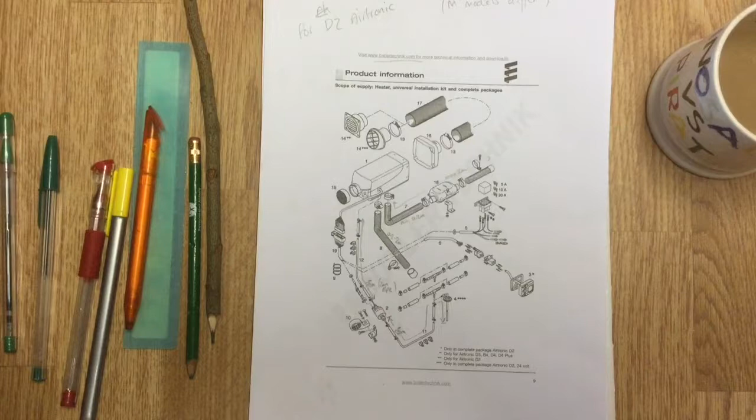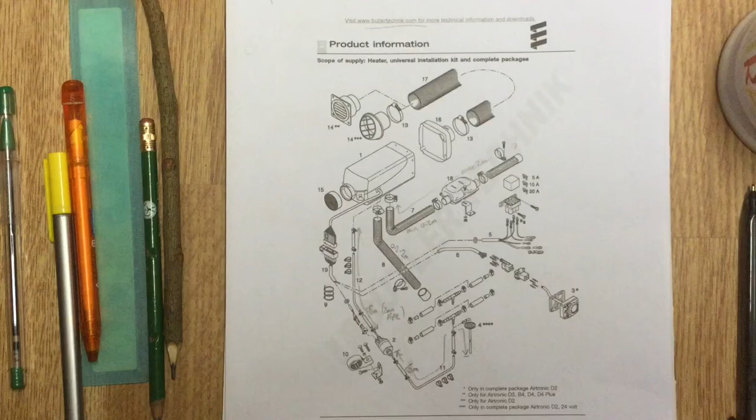I'm not sure whether you'll be watching this at the beginning or the end of the video series, so I'll try to be as in-depth as possible, bearing in mind some people may have seen the rest of the videos and some may not.

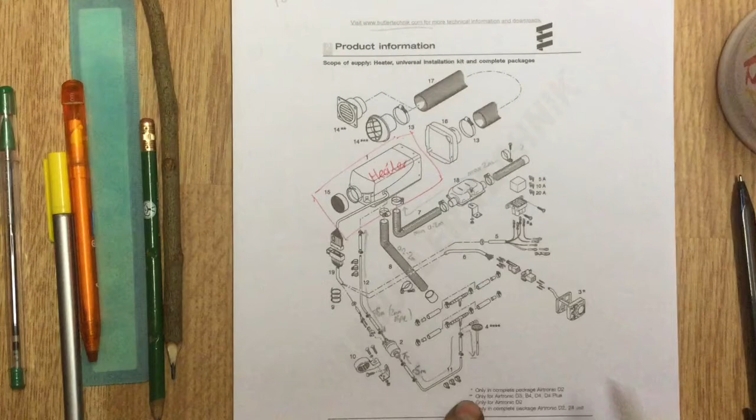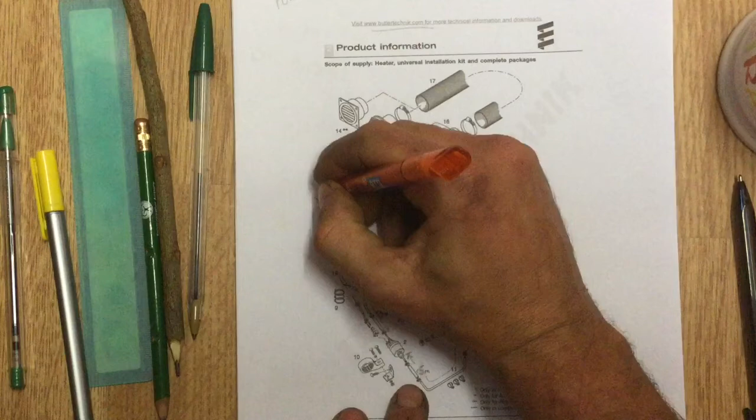So the main body of the unit is just here in this diagram - there's your actual heater. This is the main thing we consider to be an Eberspacher. We've got a few other things to consider, and I broke the video series into different sections. One part is on the mounting, and as part of that we're looking at the exhaust system and intake system, and fixing the main heater into the floor. There's a few things to consider, so we'll go through all the bits and then get started on individual sections.

As well as mounting the actual body of the unit, the other thing we've got to consider is this section here - this is the fuel section, the fuel pump and lines.

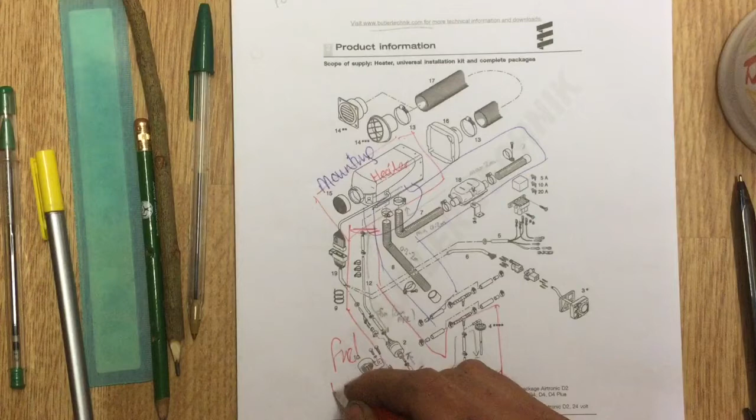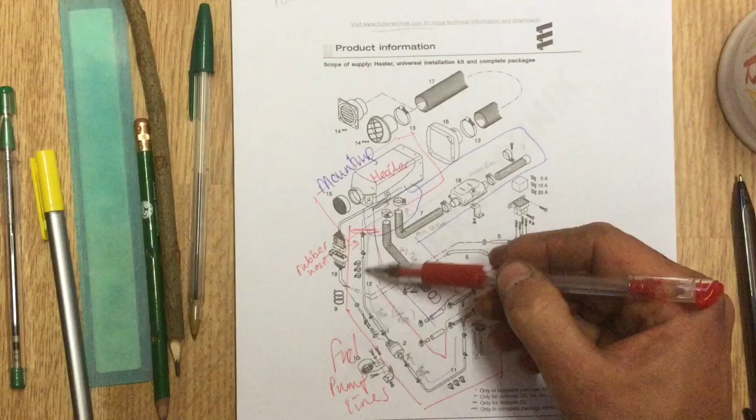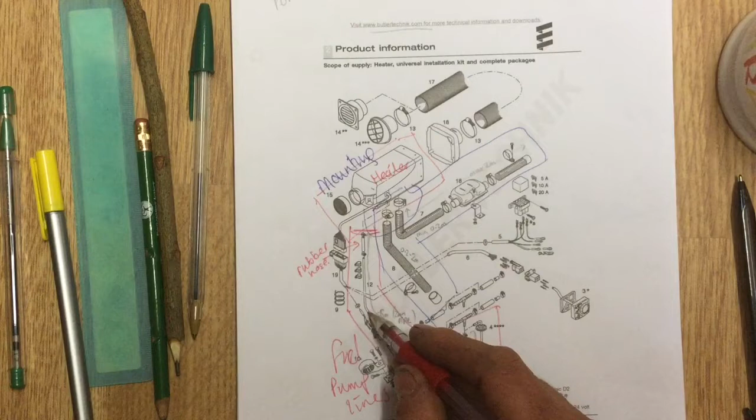That consists of a pipe that comes out of the bottom of the heater, which is underneath the vehicle. We have a small rubber hose just there - you could do it with solid fuel lines all the way, but generally in a lot of the installations I've done I've used sections of rubber hose with a jubilee clip on either side, and then a section of pipe that runs to the pump. The internal diameter of this is about 4 or 5 millimeters. We have another piece of rubber hose here, and it goes over this solid, rigid fuel pipe. The jubilee clip goes onto the fuel pump itself.

So this is the actual pump just there - it's quite small, no bigger than a normal automotive one, about this size. That mounts remotely from the heater, so the fuel pump's not actually in the heater - we mount it further away, and then we have another hose that leads to our fuel system.

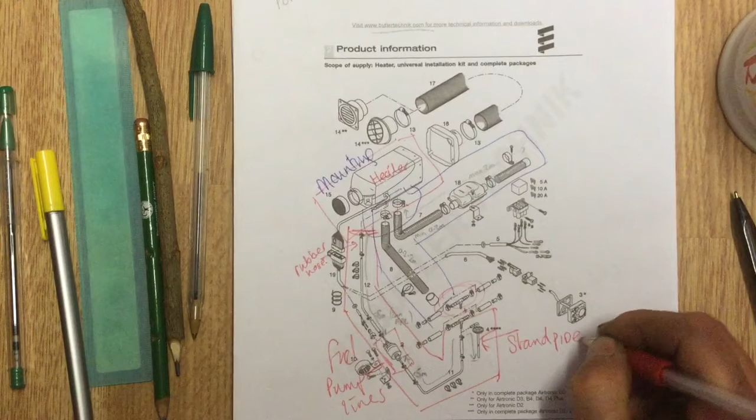If you were installing this into quite a few vans, you'd end up using a T-piece - you just tee into a fuel line running to your engine, which isn't very difficult. I may do a video on that if people ask for it, but the installation I'm going to look at uses a stand pipe instead. The reason for using that is explained in one of my other videos - it's to do with the pressures in the fuel lines in the Citroen Relay. We actually have to install this into the fuel tank, which isn't a difficult task if you know what you're doing, and if not, I'm hoping I've provided enough information that anybody could do it.

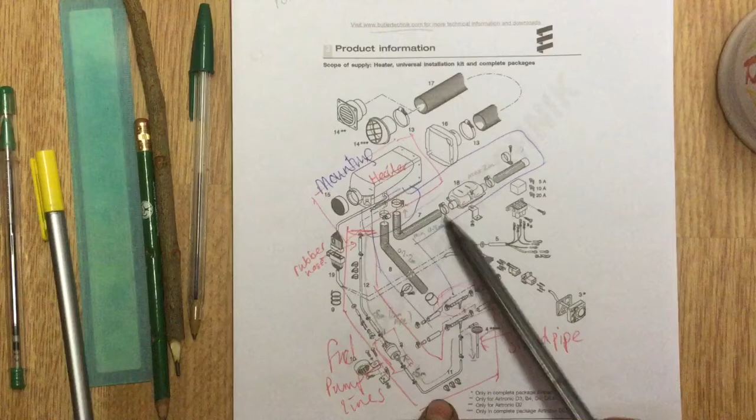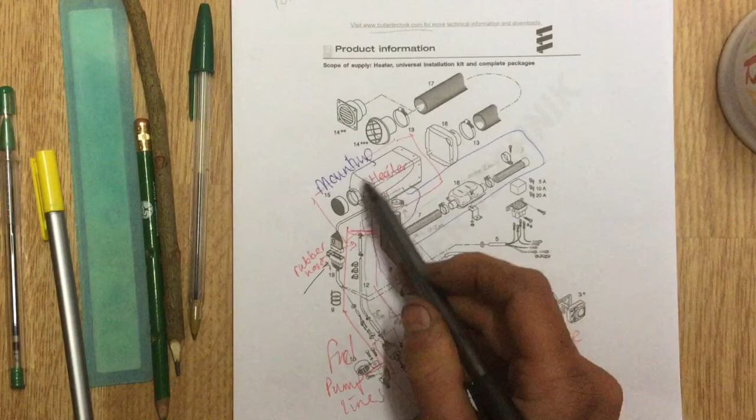After the heater's mounted, with the exhaust and intake for the burner done, then we look at the fuel lines. After that, all we've got to do is wire it up, which consists of plugging the main unit into the wiring loom, which is 3 cables.

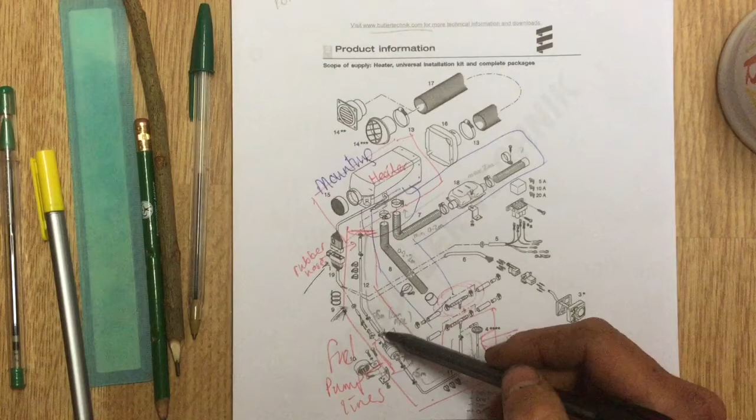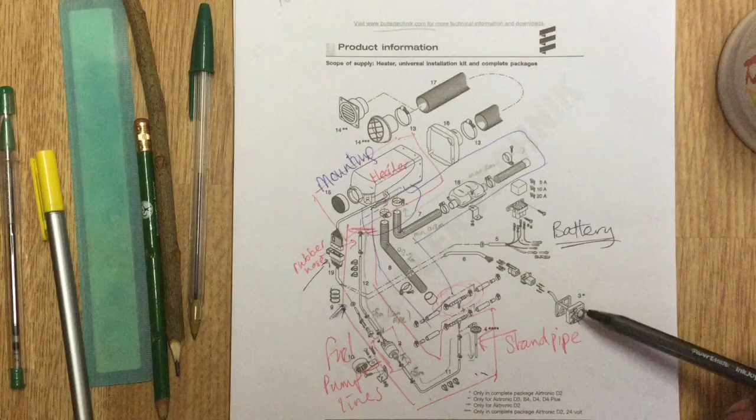One of them runs to our fuel pump - this cable is actually quite a few meters long, probably 4 or 5 meters, and just runs to the fuel pump. Another one goes to where we get our power from, the main Eberspacher power line - this goes to our battery or whatever power source we're using. Then we have another cable which goes to a controller. There's a lot of controllers available; I'm not too sure of the particular one shown in this diagram - I do have one in a box somewhere - but the one I'm going to look at in my van is the 701 timer, a 7-day programmable timer.

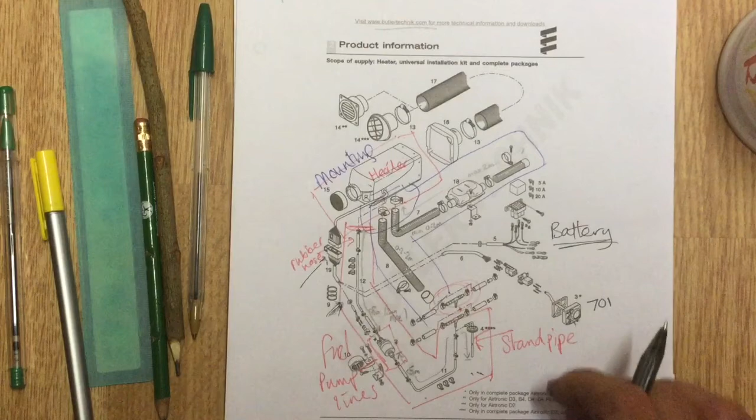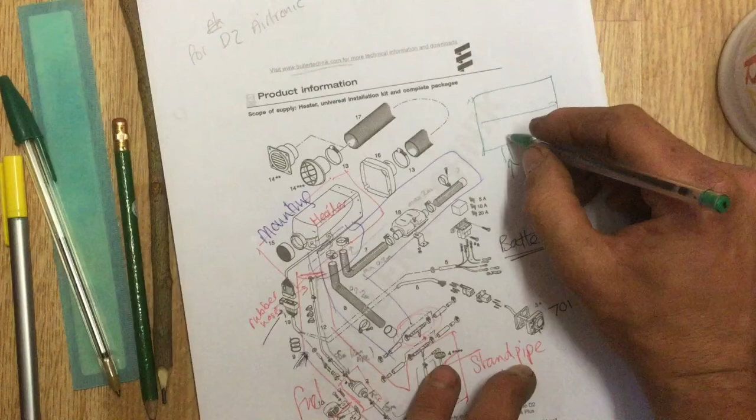So the way the Eberspacher works is there's 2 sides to it, a box. In one side we have an intake and an outflow on the bottom of the unit, and this comes in, and that's where our fire is, that's where we've got a little turbine. It's obviously ever so slightly more complicated than this, but that's what we're going with.

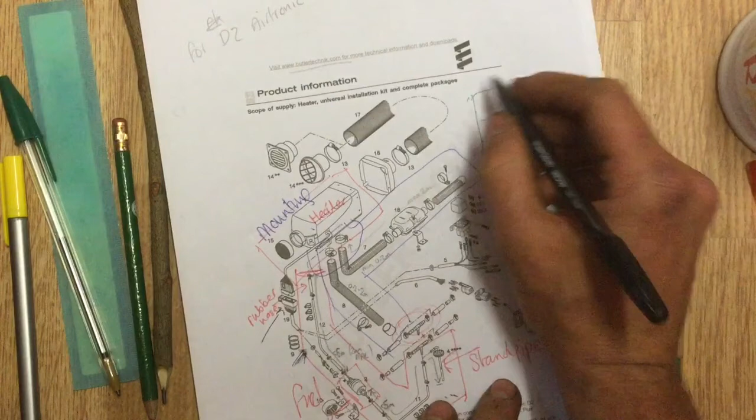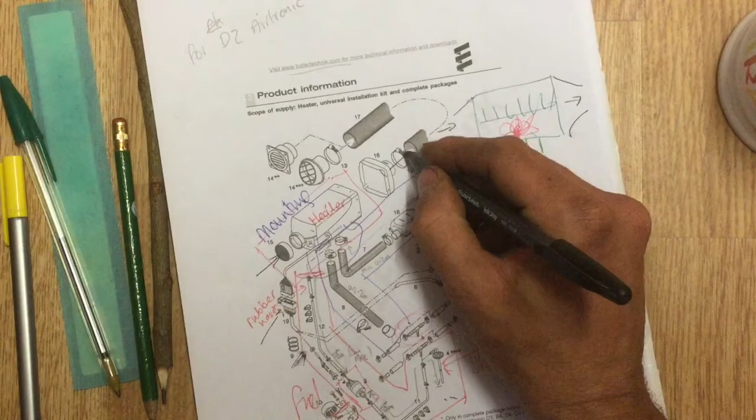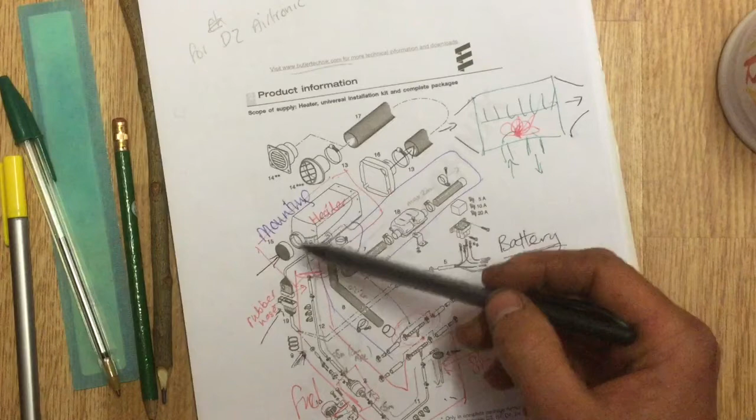And then on the body of the heater itself, we have an in and an out. In there, all we've got is a heat exchanger that transfers that heat. So the air that flows in through this pipe and out through this pipe never actually goes near the combustion itself. That's out in a separate place which vents through these pipes out through the floor of the van, so we don't have problems with gas exchange and things like that, and that's how the system works.

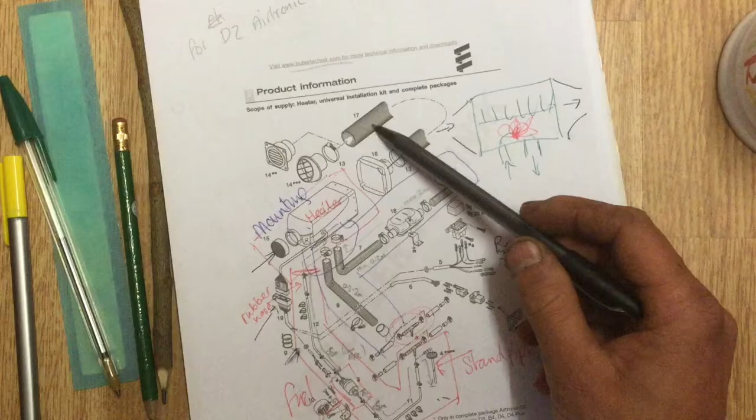So there's just a fan that draws air over a heater grill to warm the air that comes into the van. There are limits on how long we can have these pipes, and there's limits on the angles we can mount this at, etc. So that's what we'll have a look at next day. Move that to one side.

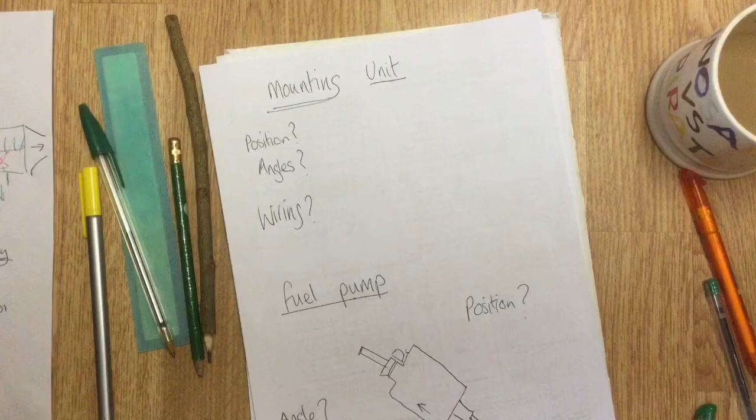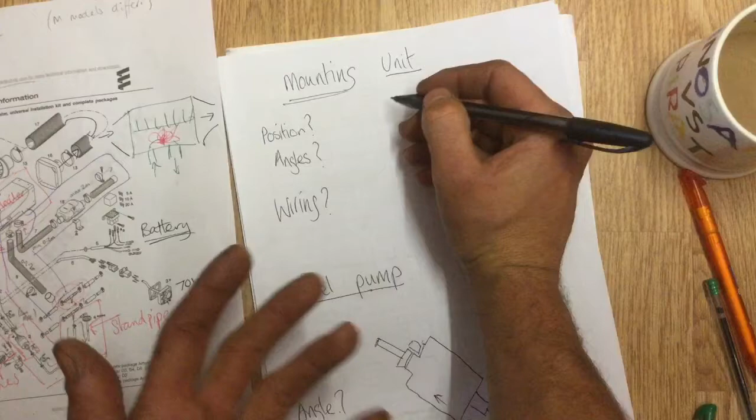Mounting the unit itself - hopefully I managed to keep some of the same terminology. So that's actually mounting the heater unit just here. Things we've got to consider is the position of it. We need it to be mounted so that the intake and outflow can exit, so ideally on the base of the van.

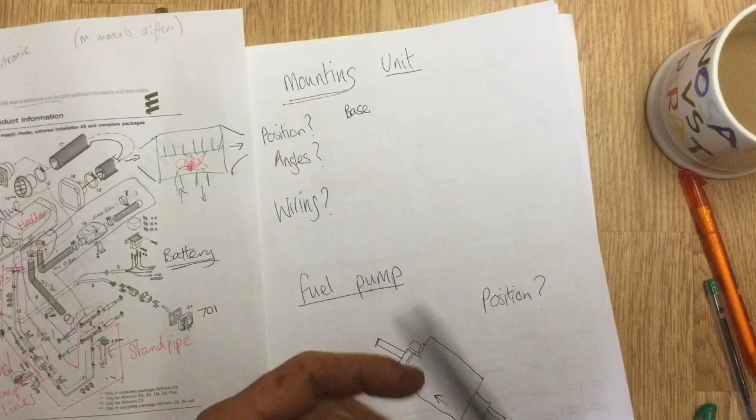You can get external mounts. I'm not a big fan due to the fact that any salt, any road spray, all of that is going to end up on your heater, and it's probably not going to last as long. I'm quite fond of keeping them in good nick because they're quite expensive.

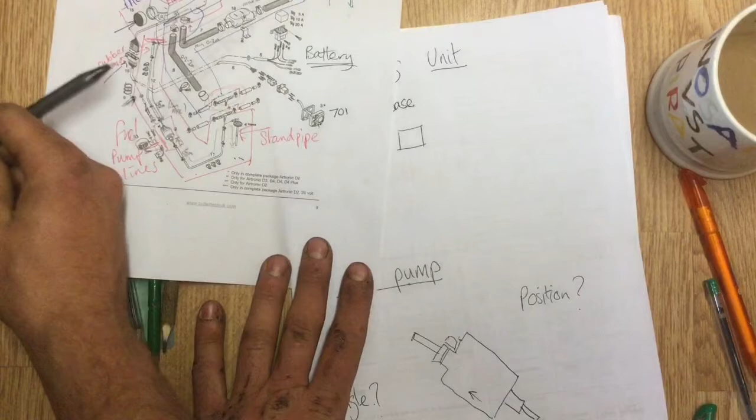The angles that we can actually mount the heater - if we think about this as an end-on view, so this is looking onto the heater this way, and then we'll draw it the other way very briefly for you. I'm not the best of sketchers here. We've got two pipes coming out of the bottom.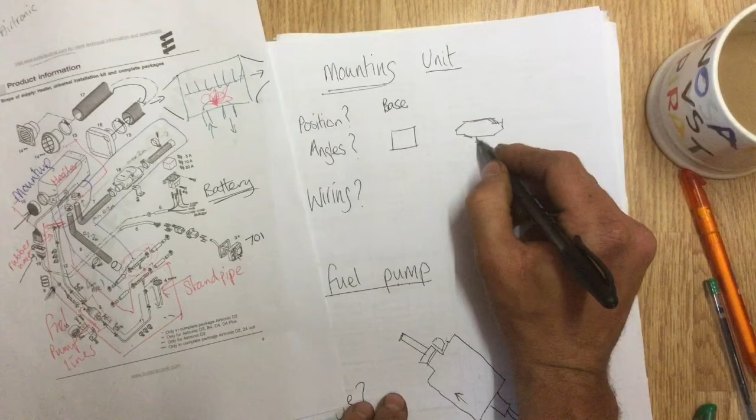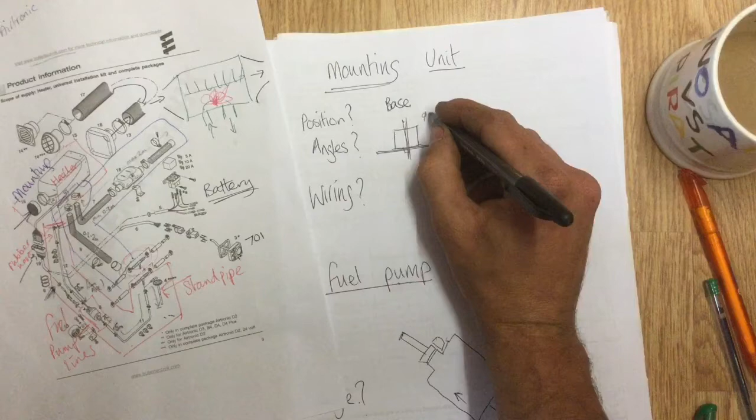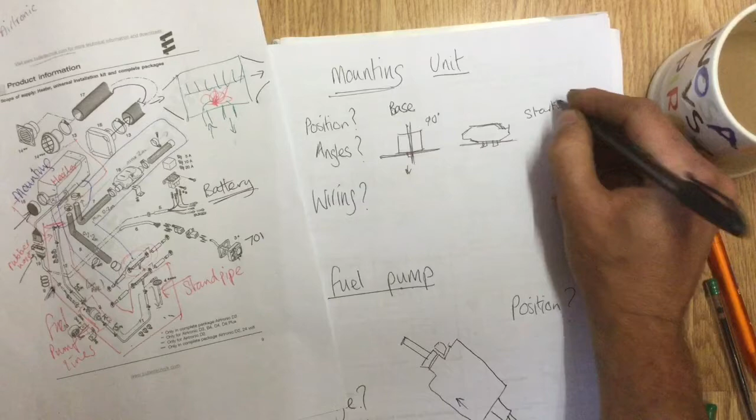With the heater in this orientation, we've actually got to mount it pretty much 90 degrees, so that has got to be relatively flat. It will stand a little bit of swaying in a boat, but you can't really mount the heater on its side or anything like that - the vents have to come out of the bottom. As far as mounting in this other orientation, this plane, it's less crucial. It'll withstand starting, apparently according to the technical drawings, up to a 15-degree angle. So we could have this mounted on, say, that kind of angle and it wouldn't matter.

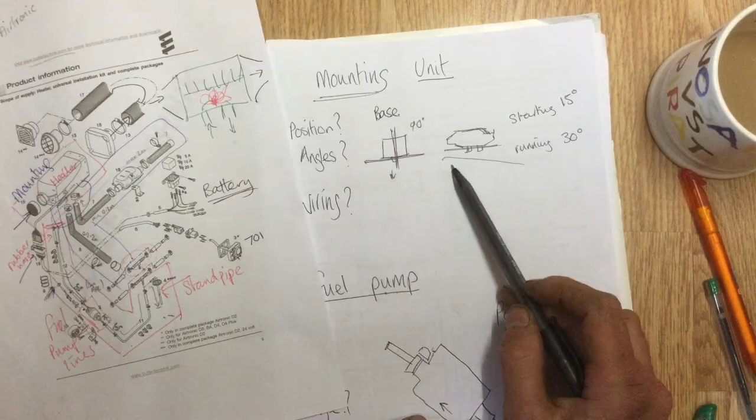And once it's running, it could stand up to 30 degrees. So once it's running, if you were in a boat and it's tipping from side to side, we could maintain that - it's not a problem up to 30 degrees, but it won't ideally start above a 15-degree angle. It probably would fire up, but it'd not run very well.

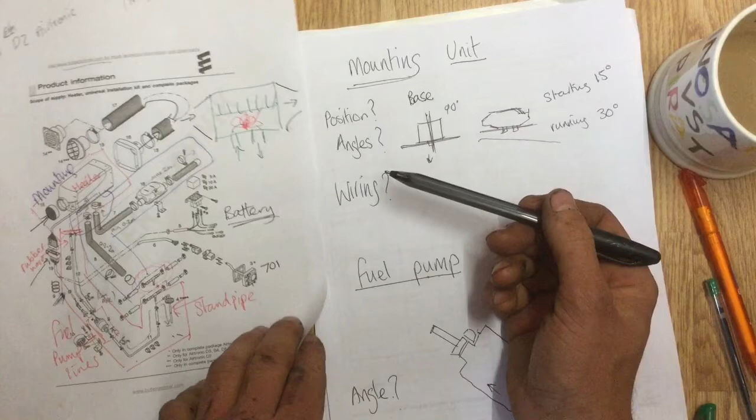With the units, I tend to mount them either as far away as possible or under a bed, things like that, where they've got a little bit of sound cushioning.

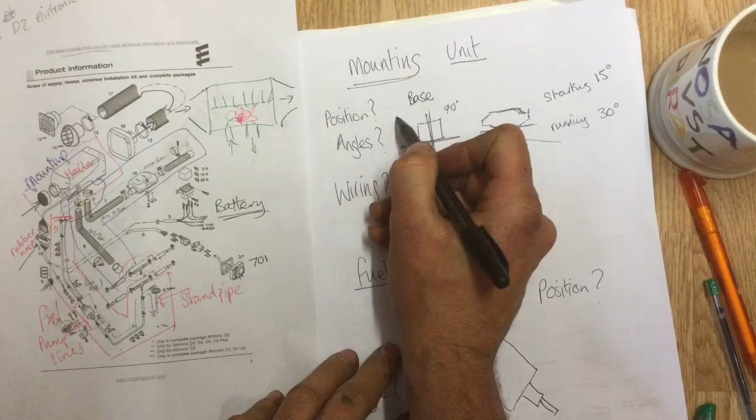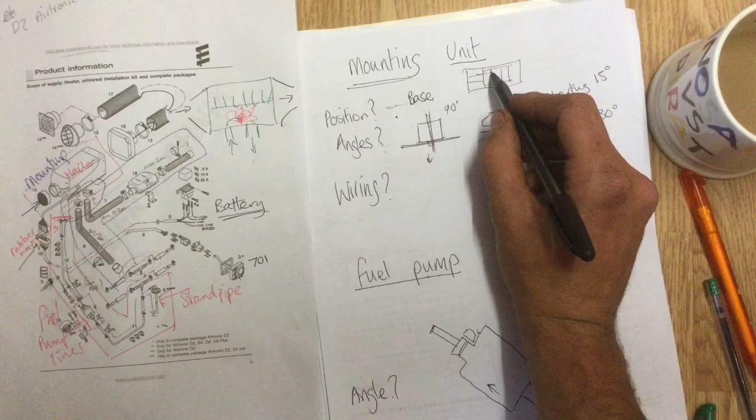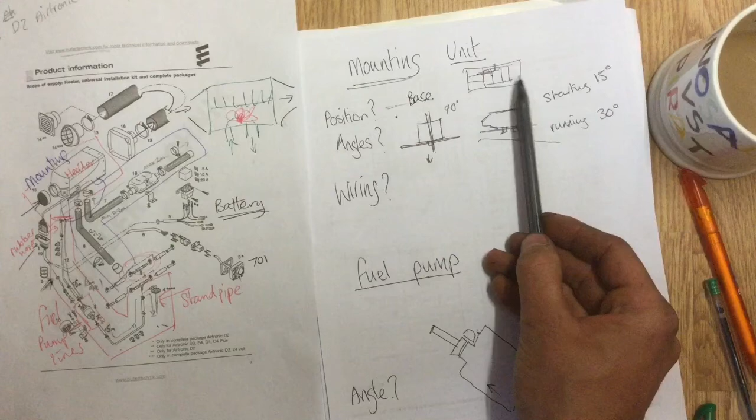The limiting factor on where we can put it is having an actual flat bit of ground we can put it on. The van has been this shape looking down from above or below, but actually under there you've probably got a lot of beams and cross members, and I think my van is something like this with cross members. So where these cross members are, or say where the exhaust system exits the van, I can't mount my unit there because there's not enough room for it to go through the floor without damaging these cross members, and these cross members are structurally important, so we don't want to go damaging any of those.

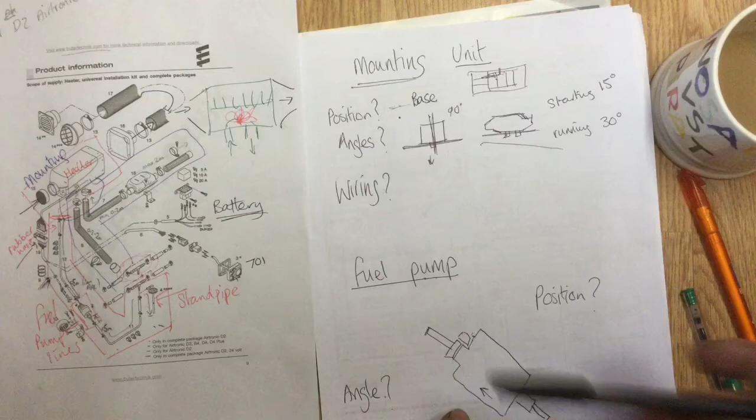Wiring - it's about how long your cables are. If it's a new installation, you get quite a lot of cable, more than you could need, or in a kind of normal van need - it's 5 meters, 6 meters of cabling. If you're getting the unit from an older vehicle that's used, it's worth getting every bit of cabling you can, so try and recover as much of that cable as possible, because it is going to come in handy.

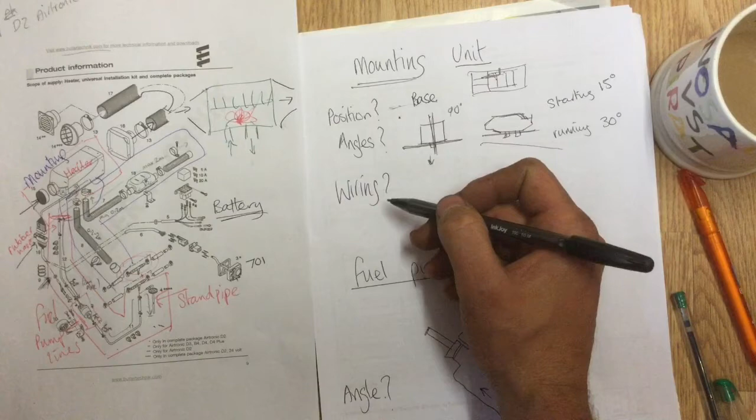You can extend certain wires, such as the fuel pump. I know people who've made the fuel pump wire slightly longer because when they've got one it's been cut off. You can just extend them, and the pump's not as sensitive to voltage drop or polarity as you'd imagine. But I've not had any experience of extending the main part of the loom here.

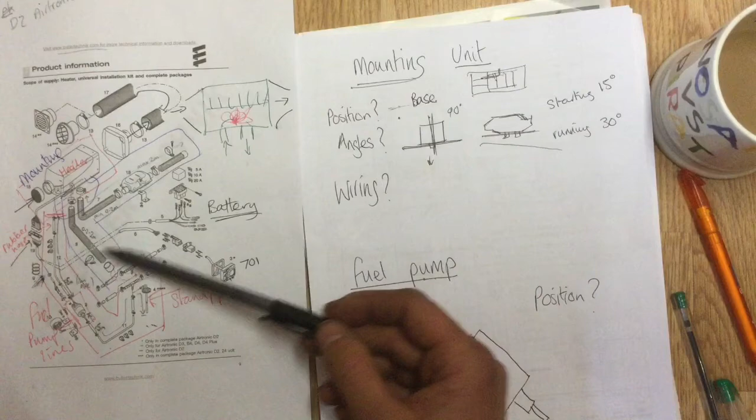It all depends on your voltage drop — that's another subject altogether. Any issues on that, get in touch and I'll try and solve it for you, but right now I can't really say much about it.

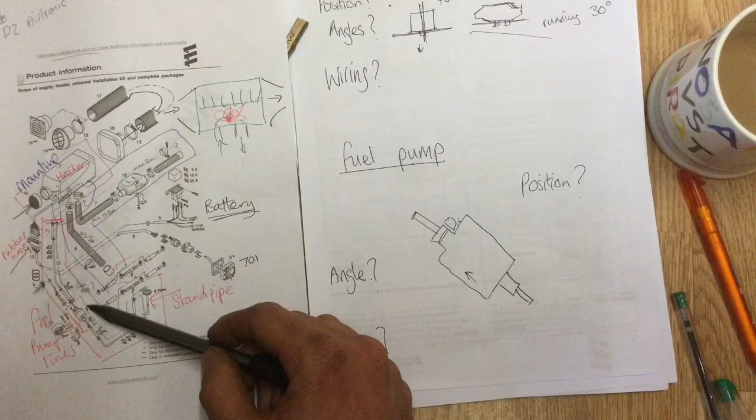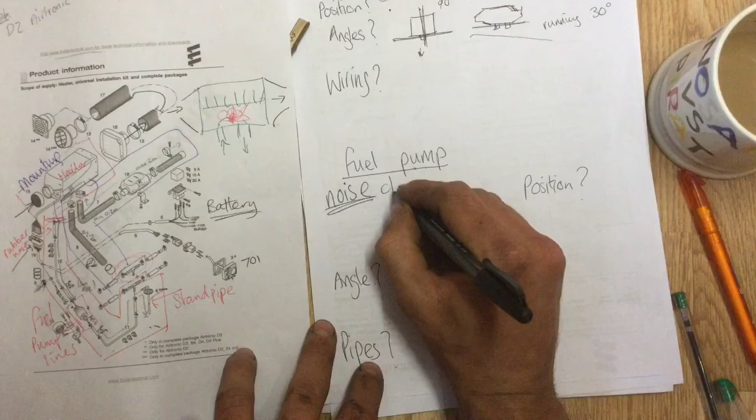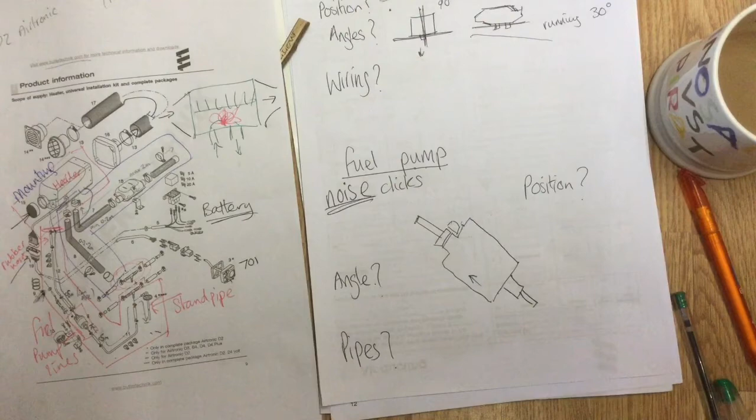So fuel pump is the next part. We've looked at mounting the heater and the angles that'll survive. Next we're looking at this fuel line. A few considerations on where we mount this — the biggest one for me is the noise. It clicks; it's not the loudest thing, and once you're used to it you sleep through it, but there's definitely an audible click. It's not so much kept me up, but if I've pulled up somewhere it's kept the neighbours up around me, so it's worth putting it somewhere sensible.

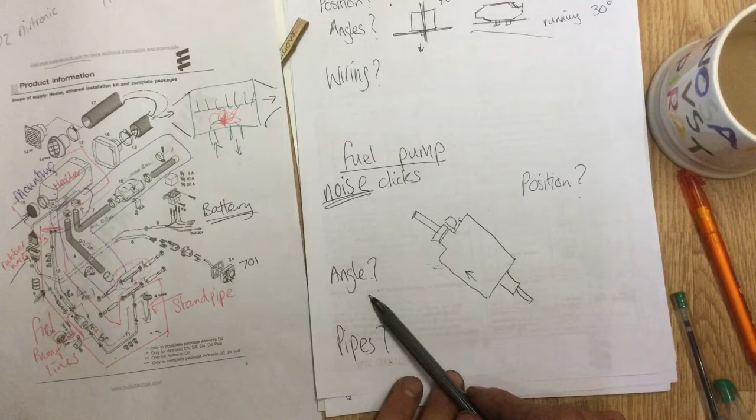How I've got around this is I've chosen to mount it in the engine bay — I figure that's where the most soundproofing is, and it's as far forward from the sleeping compartment as possible. The positioning of this unit can kind of go anywhere; it's not that sensitive to dirt, and we can protect it a little. I tend to mount these either under the van or in the engine bay. The main thing to consider is the pipes and the length available.

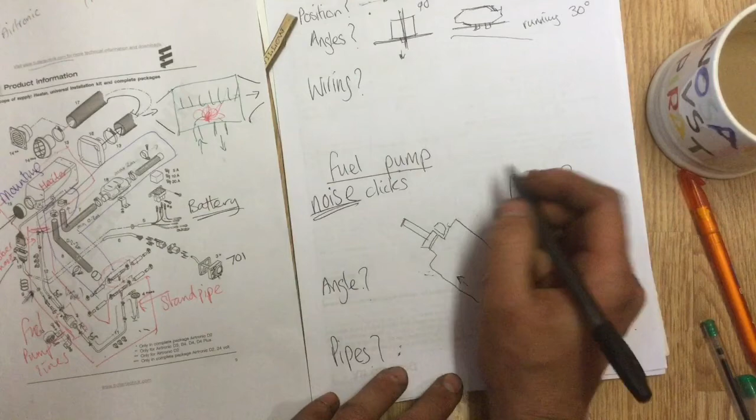You can't indefinitely extend the pipes. Unfortunately we've got a max of 5 meters on the D2 units from tank to the unit's pump, and then on the high pressure side that goes to our unit we've got a maximum of 6 meters. Five meters in a straight line plus six meters — that's 11 meters, which sounds long, but once you've routed the cable around different sections it can surprisingly be a limiting factor. As with everything, we've got to think about angles too.

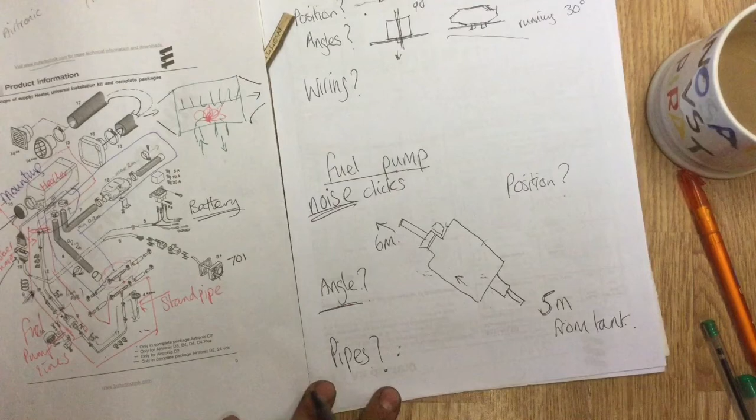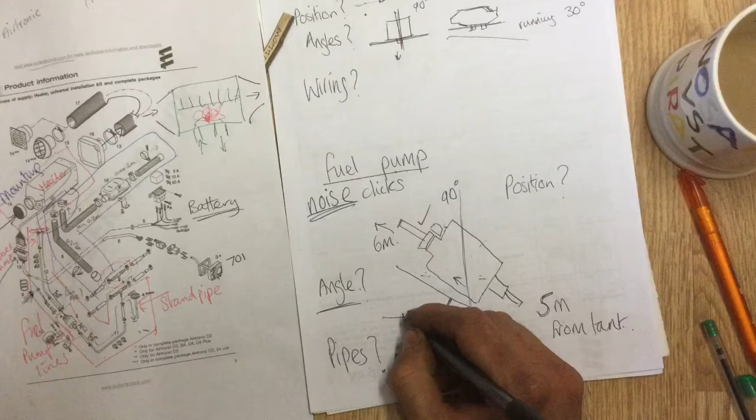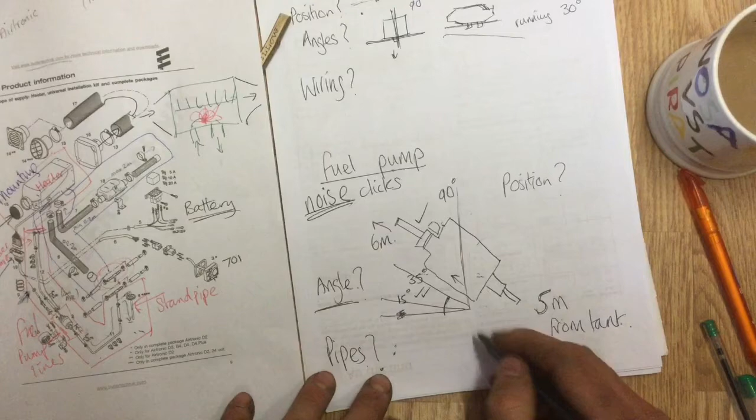So the maximum angle we can go is up to 90 degrees, up to this plumb line here. We can mount it up to 90 degrees in this orientation and the unit will be fine — that's okay. Ideally though, we want to be somewhere between 15 and 35 degrees; that's the optimum level. Anything else down here is a big no-no.

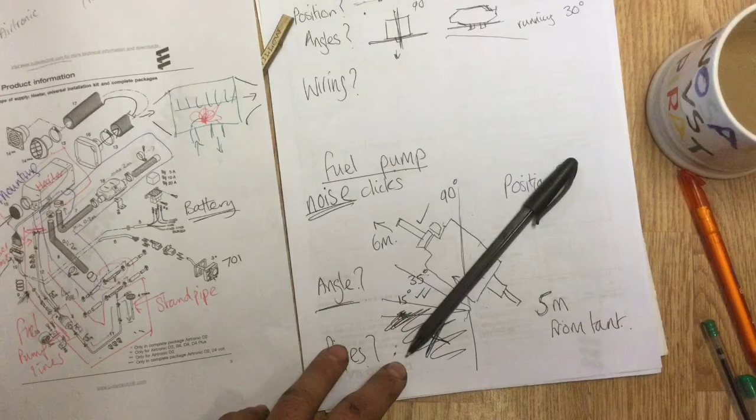The way I think of it is, here's the connector — we don't want our electrics to point downwards. If they're below that 15 degrees, your pump will wear excessively. It'll be noisier than usual, something to do with air getting trapped inside. I'm not 100% sure why, but it just doesn't work. So we don't want this mounting downhill unless you want to buy a new fuel pump after a very short period of time.

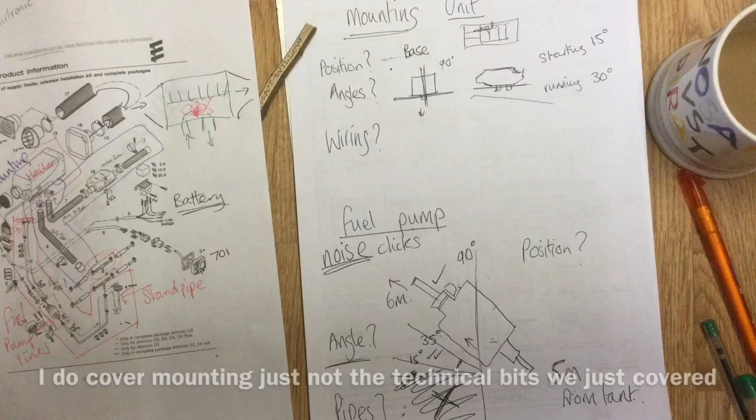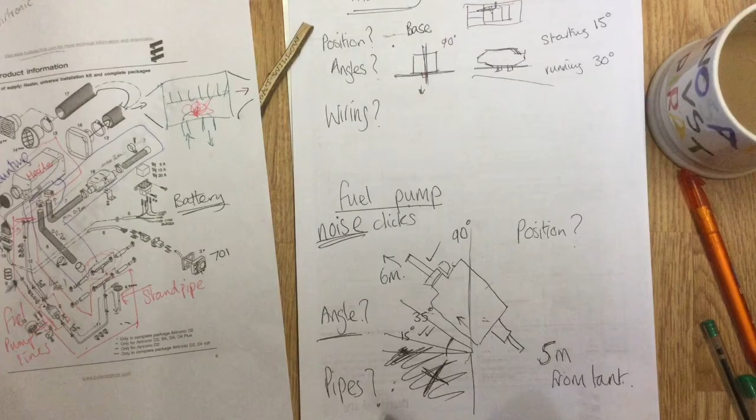In my main videos I don't really cover much of the mounting of these, but it's definitely something we need to consider — I just try to keep the video size down on the others. So we'll cut it there, and I'm going to do a part 2 where we'll look at the ducting — the internal ducting within the van and the maximum capacities and things to consider when routing that. Hopefully that'll cover it.

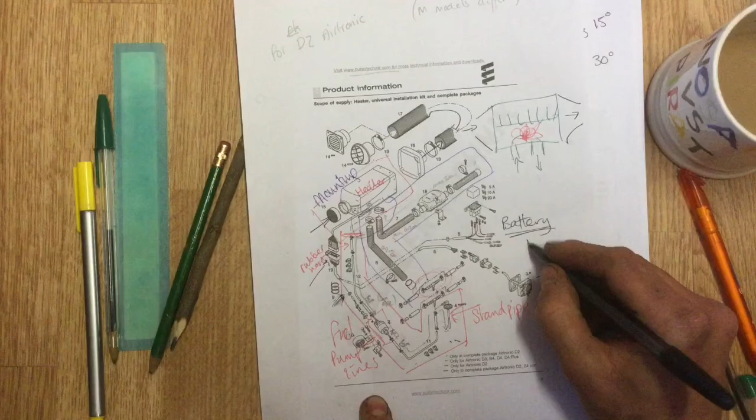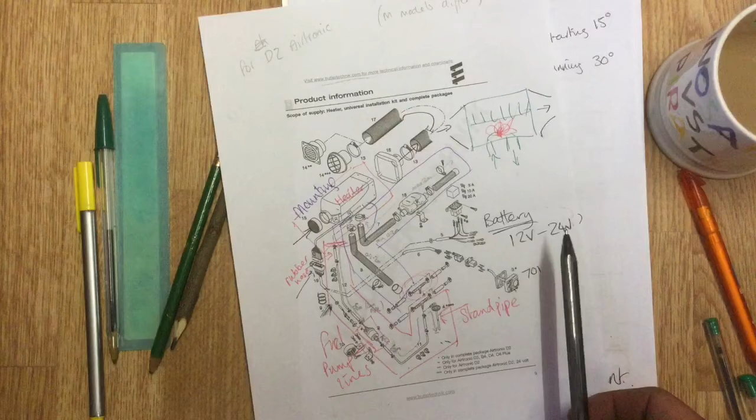The only other thing to add is we won't do too much on the electrics, but it's either 12 volt or 24 depending on your unit. Steppers from 12 to 24 and 24 to 12 aren't great, so I'd advise just getting a unit that runs on the power you have available. The reason is you get quite a bit of voltage loss, and it's very difficult to drop exactly the correct amount.